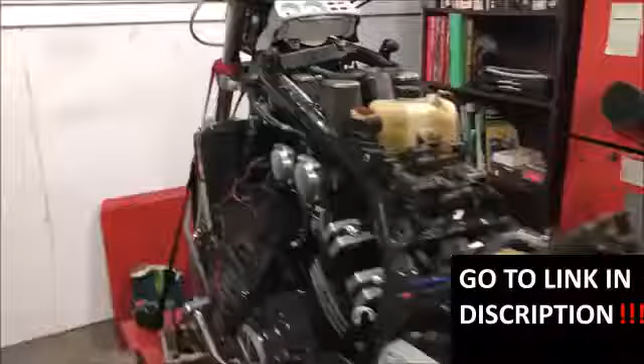Let me show you a little tip here. I'm working on this VMAX again, finally got everything I think I need to finish this baby up. And as I come back to the bench, it's been sitting here for about a month, I see this on the bench as I start to lay my tools out.

Well, I could tell that's something to do with battery acid. I can see it's on the frame. So just going up, I went ahead and pulled the battery, and you could see fluid on this side. This is a good point of why you need to check your evidence here. The battery has a crack or something in it that's allowing it to leak out on that side.

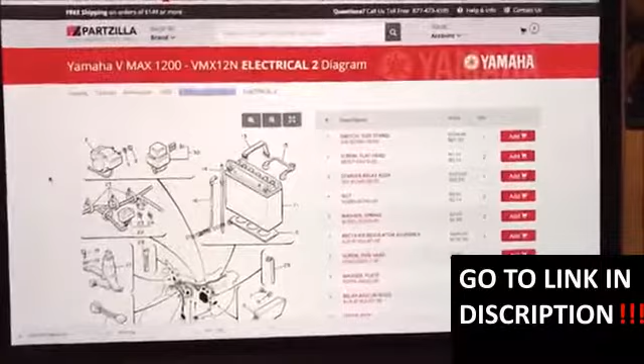All right, stop right there. We got to figure out why this would be leaking. What would cause that battery to crack? All right, we're going to finish this off the way you should. I'm back up in the office here at the computer, and I want you to think about whenever you find something like that, you've got to ask yourself why. How's that battery just going to crack, or what's that look like?

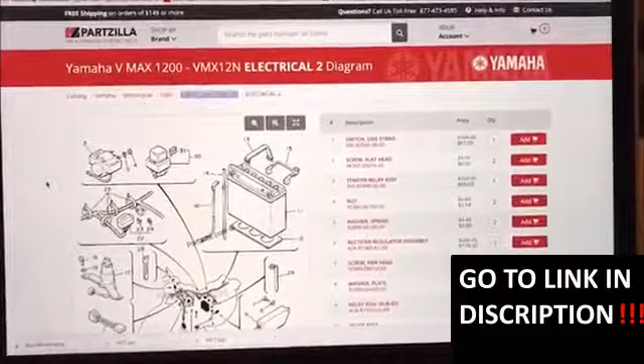First off, we think of the motorcycle. Yamaha VMAX is known to vibrate a lot. It's a big, powerful, torquey V4 motor, and that thing will shake. So that's one thing you know about batteries, especially being a technician for a long time, is we see quite often that the battery strap is missing a lot, which is the case in this battery, and I've already talked to the customer about it.

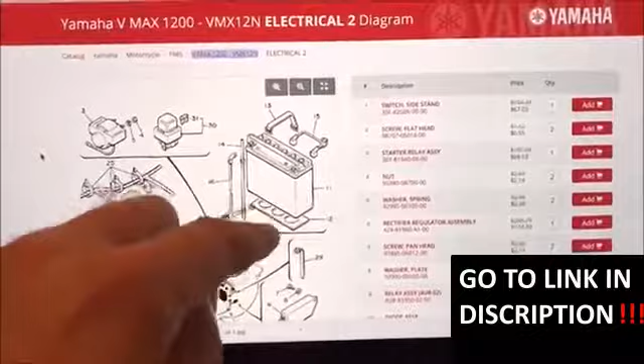But just thinking about it, I decided, you know what, I wonder, looking at that box and seeing there's no rubber pad underneath - really well-designed motorcycle and power sports battery systems almost always have some type of rubber dampener or pad under it. So look here, on the parts fiche, item number 12, they're calling that the battery seat. That's what it's supposed to sit on.

And then also look at this - this is kind of a cool feature of looking up parts. You can see what it fits, but you can also see what it's reported to fit for everything else. So they've used that rubber pad on those VMAXs all the way to 2003, it looks like.

So here's my point - as a technician, you really need to go the extra mile and find out what's causing that problem. It might just be that the parts wore out, but man, you start looking around and the whole mechanic mentality is, hey, this battery is just sitting straight on plastic. There's a really good chance it's going to vibrate, cause it to crack or have a problem just like it is.

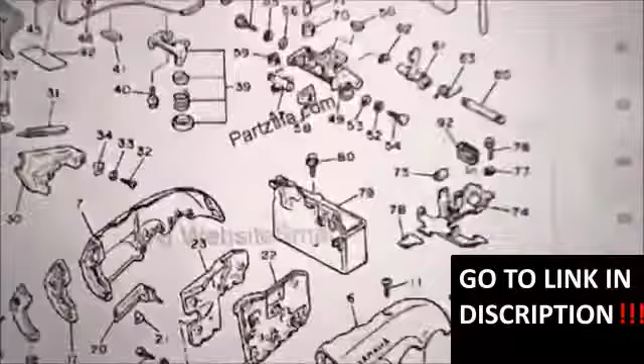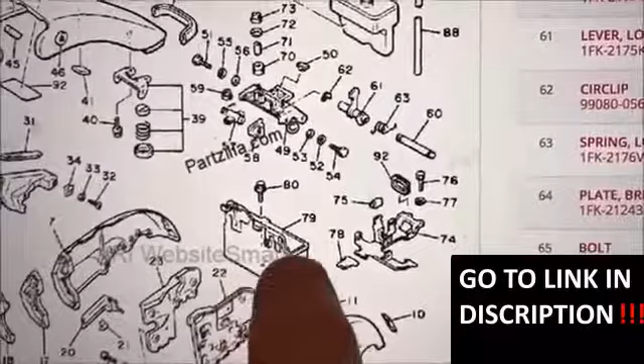So there's no point in me putting a battery back in the vehicle and then eventually the same problem showing its ugly head. You can see here on the battery box, when I really got to looking down inside there, one bolt is broke off and the other one is actually eaten up by acid. I'm going to have to drill it out to go ahead and replace those, but obviously the last tech maybe just took that out, threw it away, who knows, stuck the battery in, they didn't know it, something happened.

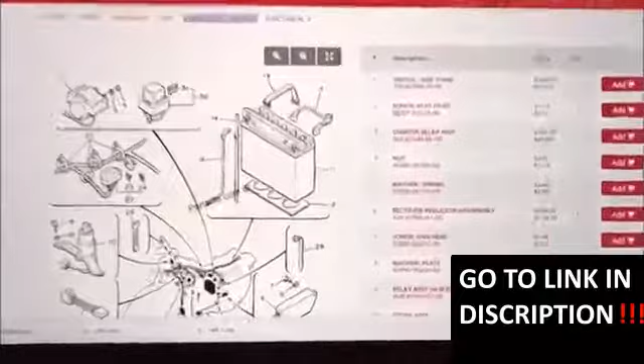This is a perfect example of how you can deliver some quality and craftsmanship in your work. Go the extra mile, hit that parts fiche up, don't pretend to know it all, and double check to see if there's a possibility of something missing. You'll start to see a lot of the manufacturers do a lot of similar things, like strapping batteries and rubber dampening them. It's really not rocket science.

And these conventional batteries, it's definitely a good reason that anytime you're going to service these, to not charge them or mess with them in the bike. And there's definitely a problem with that casing, because the acid is literally just leaking out of there. There's no way for it to go up and out. It's definitely got to have a crack in the bottom. And that's all right, because we got a brand new battery to put in it.

But man, crazy what happens. So when you revisit a job like this, something you haven't touched in a while, it's just a fantastic idea to kind of review, look things over, just consider your work area. Have it nice and prepped as you get started to fire things back up to finish that job.